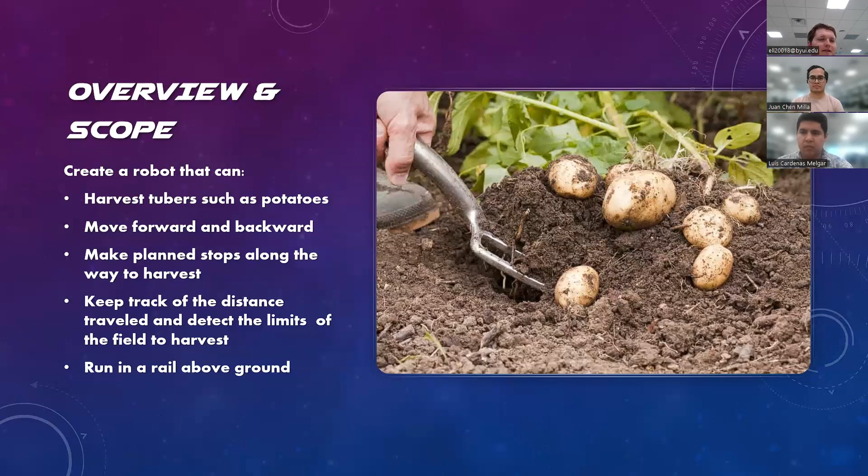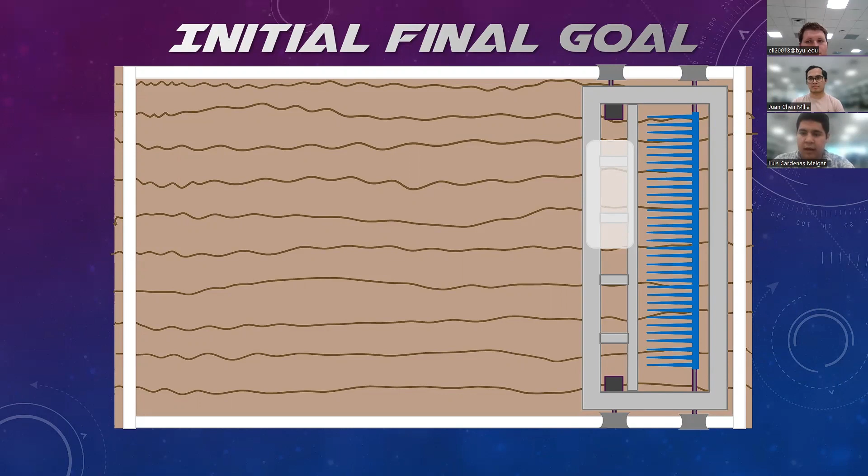Hello, my name is Luis Cardenas, and first I want to talk about what was our initial final goal. Initially, we thought about having a robot mounted on a rail, so it would be a certain amount of feet over the ground, so it could easily move and not have any problem with the dirt or anything that's on the floor. Here there is a little animation of what it's supposed to do.

It would just harvest row by row, as you can see in this animation. Once it's done doing it, it would stop at the end of the rail. In order to do this, this is more like the horizontal view instead of the view at the top.

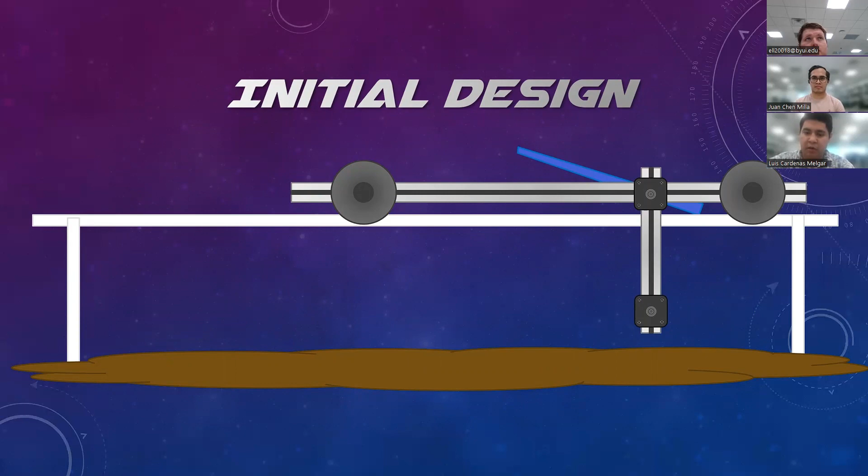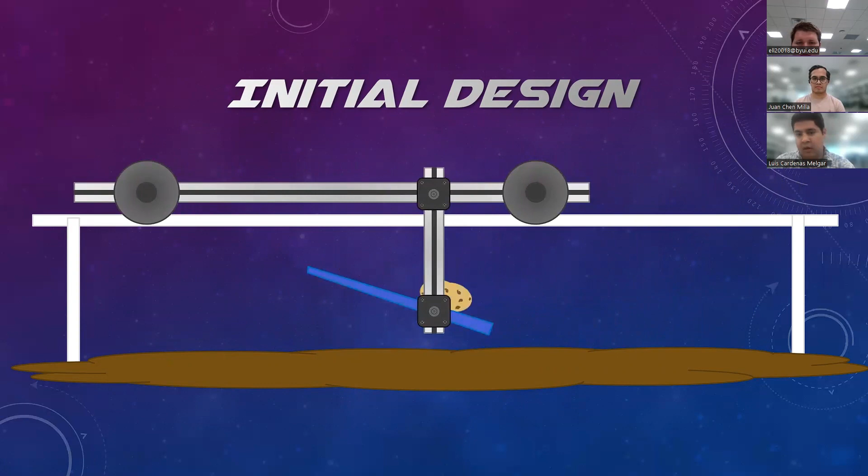We would need to have some sort of fork that could harvest the potatoes that are on the ground. This fork should be able to move down and then move forward to harvest the potato, lift it, and drop the potato behind, and then keep going to the next row.

Due to the fact that we didn't have enough budget to build the rail, and also because of time constraints, we decided to reduce the scope of our project and just make a robot to be moving on the ground. As in this animation, you can see it would just move, put the fork down, harvest the potato, and then move to the next row.

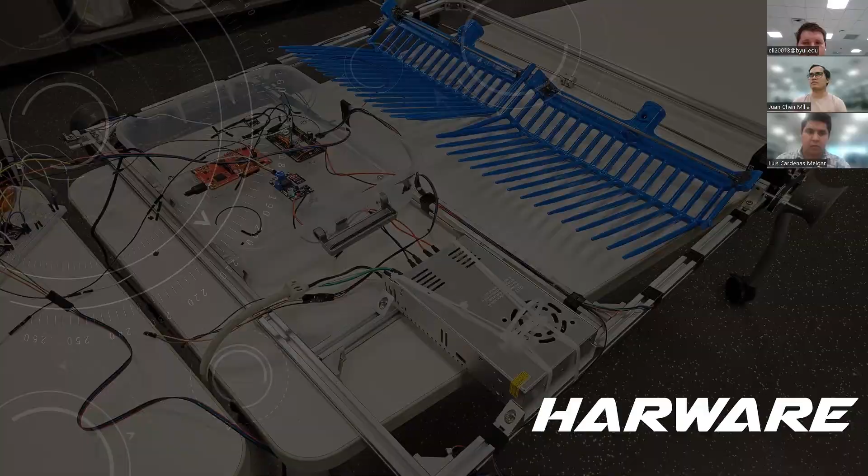My name is Juan Chen. I'm going to present about the hardware we use for this robot. We decided to use Arduino Uno since it has more libraries to operate stepper motors, and also it's fast enough for what we wanted and has enough pins. It actually has a cool feature.

It has a V-in pin, which we use to power our Arduino Uno instead of using the computer. In that case, our robot will be working by itself without depending on a computer.

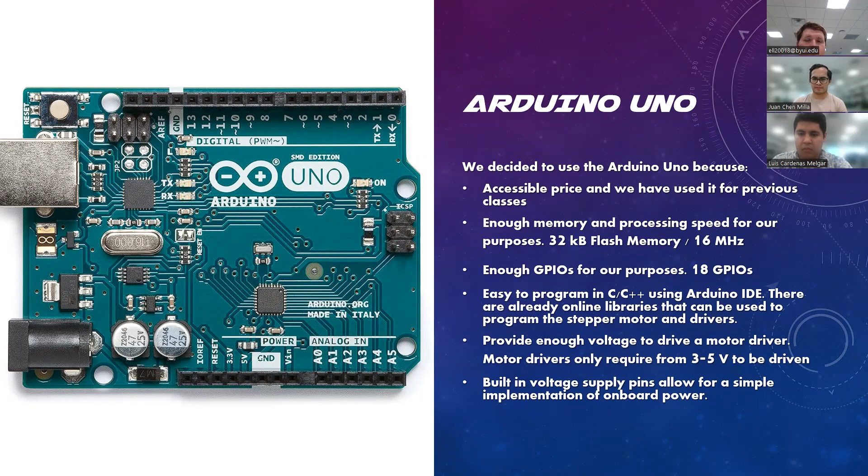To power our system, we decided to use a voltage regulator instead of using batteries. Since we didn't have enough budget, we decided to use a power supply voltage regulator. Also, since this robot is planned to be used in greenhouses, they have the infrastructure already, so there is no need to use batteries. Here are some of the details.

For example, we wanted this to step down the voltage and then convert it to DC, going from 120 volts AC to 20 to 24 volts DC. This voltage regulator has a 25 amp maximum output current and provides 600 watts of power.

We also use a DC voltage regulator since our Arduino Uno board needs a 5 volt input, and we use this to step down the voltage a little bit more to 5 volts. It's also capable of handling a maximum output current of 3 amps and a maximum output of 40 volts DC.

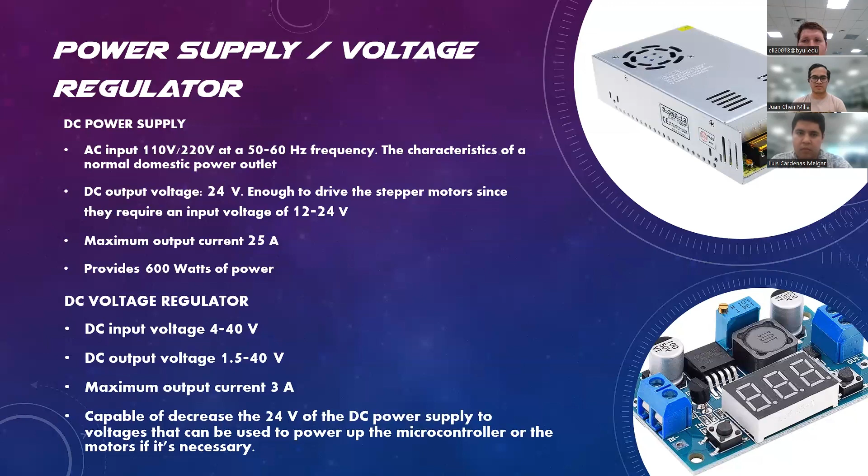And it's also able to do microstepping, which is really cool. Since if you microstep, you can slow down your motors, and also it's able to use more current. So yeah, this is what we use for motors and motor drivers.

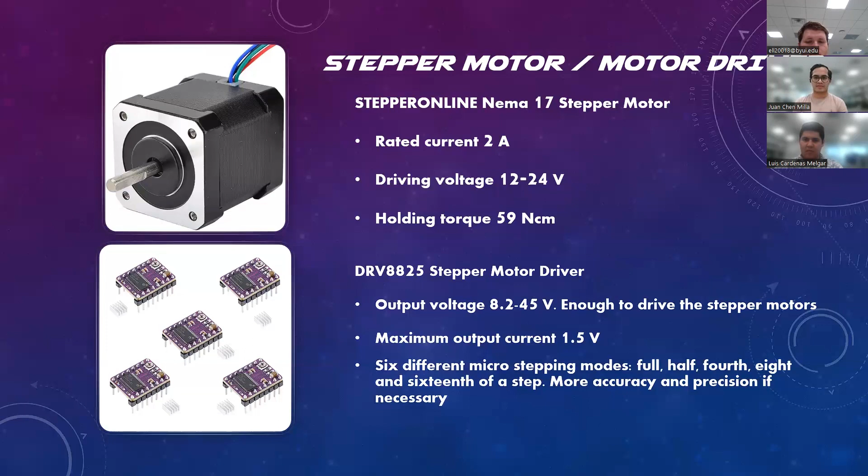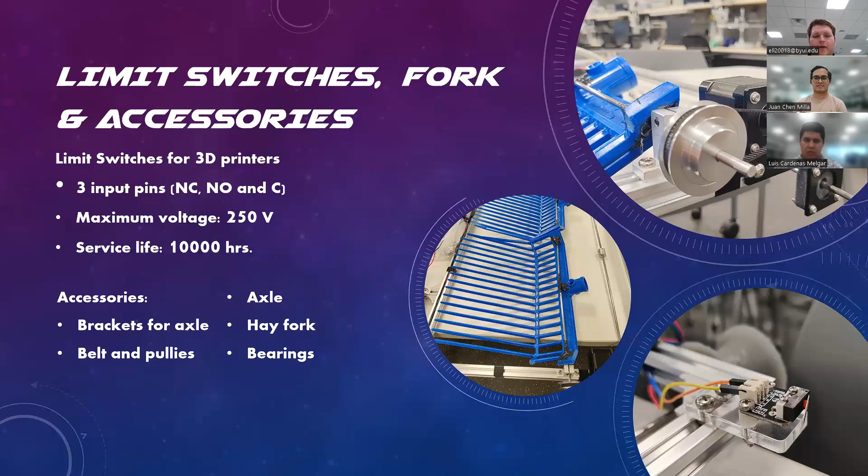We also needed some edge stop sensors so the robot could detect when it reached the end of the rails. So we used these simple limit switches, and we mounted them using custom brackets we designed. They were pretty ideal for the job since they had a lot of options for how to arrange them, and they were also decently durable.

As for the frame itself, we decided to go with some basic 2020 aluminum extrusion. These are basic T-slot aluminum beams that have 20 by 20 millimeter sides. We chose this because they're relatively inexpensive, but also very flexible. You can turn them into basically any shape you want, and they're also very strong. Using the mounting brackets, we could simply cut these beams to length and then bolt them together to create a very sturdy frame that's pretty lightweight for the strength you get out of it.

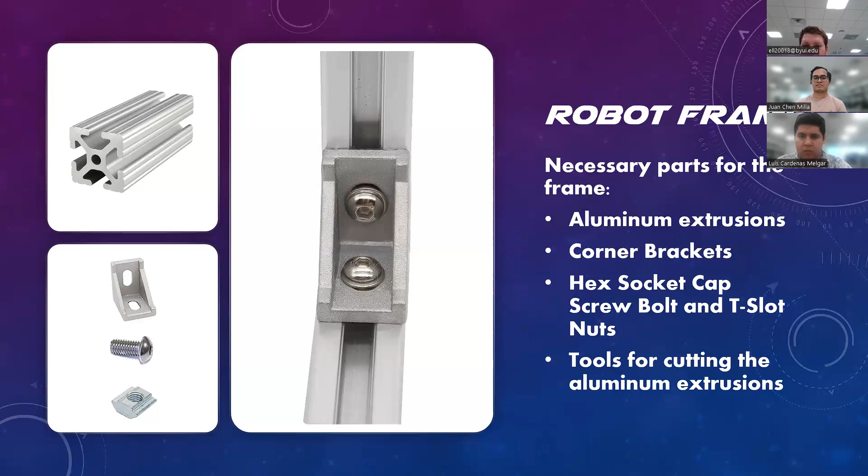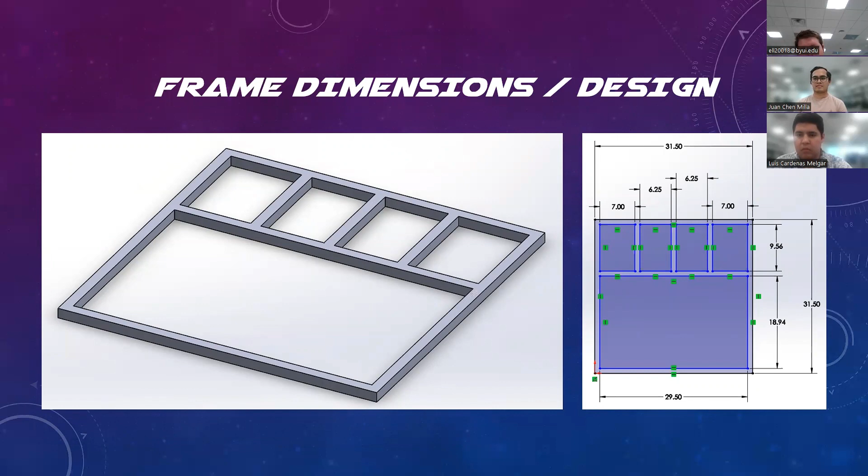So this is the design for our frame. It's a basic square. That middle section, the large middle section, is where the rakes will sit. They sit in between there, and that gives them access to the ground. The front of the robot has additional support with extra beams across it, and that is where we mount the power supply as well as the other electronics in their own little box.

As for the other components, some parts we were not able to find online at a reasonable price, so we decided to 3D print our own. We printed the wheels, and these wheels are designed with the rail system in mind. Obviously we don't have the rail system for demonstration reasons, but the robot is intended to travel on a set of rails on either side of the farm plot. These wheels facilitate that, they have an indentation, concave in the middle, which allows them to sit on a round rail.

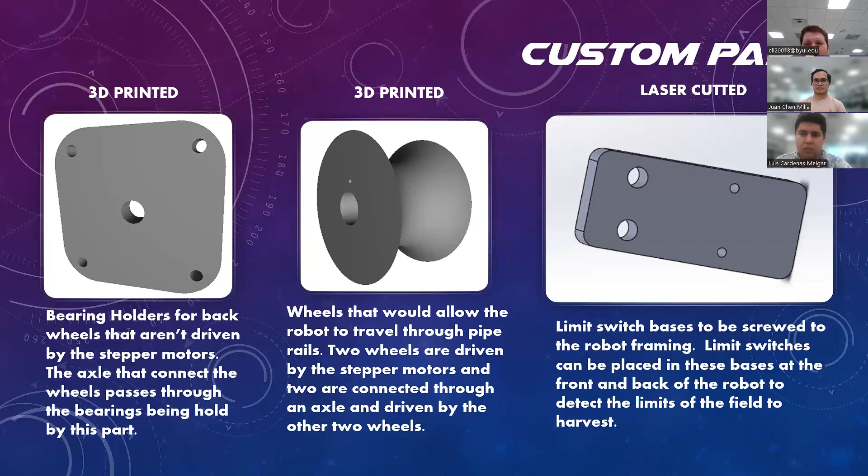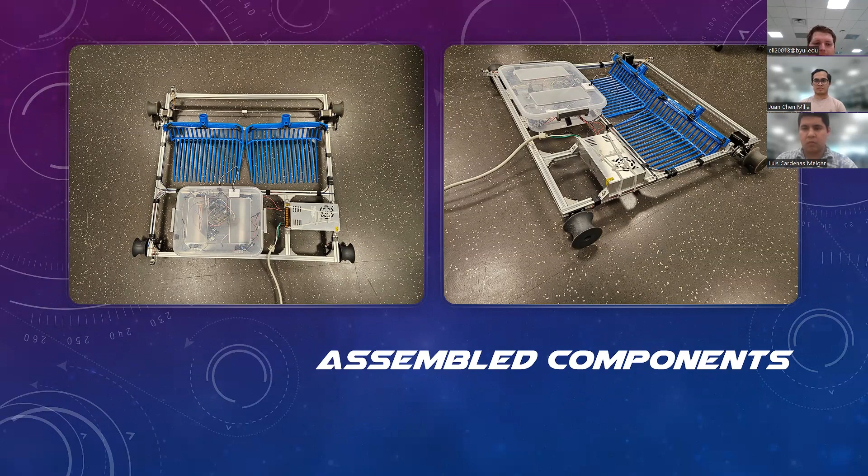And at the same time, the power supply also provides 24 volts for the stepper motors. But these 24 volts go through the motor driver first before going to the stepper motor. And also we have the signal coming from the Arduino towards the motor drivers.

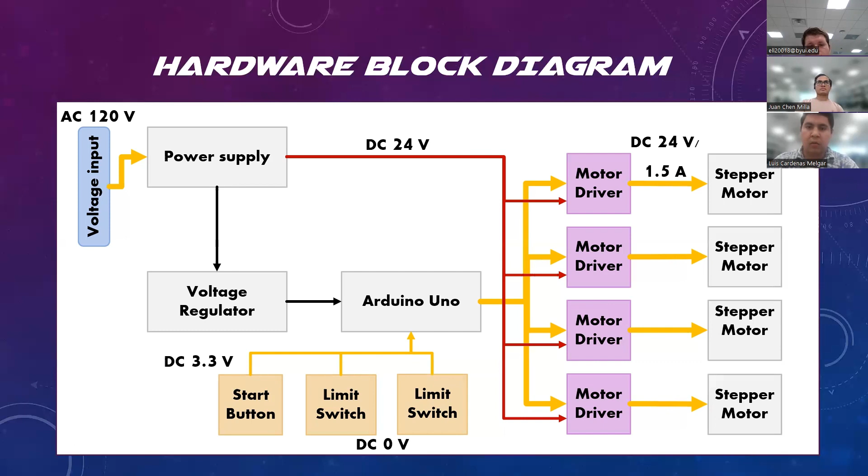And we also have the start button; we are connecting this button to 3.3 volts of the Arduino Uno. And we are using two limit switches that are receiving ground from it. And this is how we arrange our electronics also in our robot.

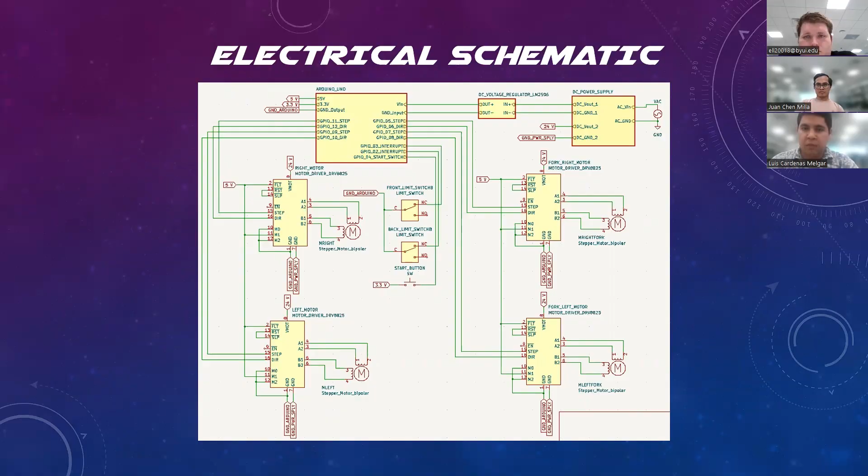All right. As for the program, the program we were running is a simple harvesting routine. The simple harvesting routine we programmed is one that didn't really have any parallel processes going on. It was all sequential. So as a result, we decided to use a basic control loop rather than an operating system. And so this control loop would go through several states, and each state would be controlled by either an interrupt or a condition based on the context of that state.

So at the start, it would initialize all its variables and create the motor objects that the motor driver library uses. And then we'd start with a basic idle state, which, once it received a signal from a push button that we have to start, would transition to its next state. And then the initial state is a calibration state where it reverses until it reaches the very back of the plot, and the back limit switch is hit.

And when that happens, the robot knows that it's at the very start of the plot, and so it resets all of its tracking variables, so its position and its cycle count. It resets all those to 0, and then it moves on to the running state, which is the start of the harvesting routine.

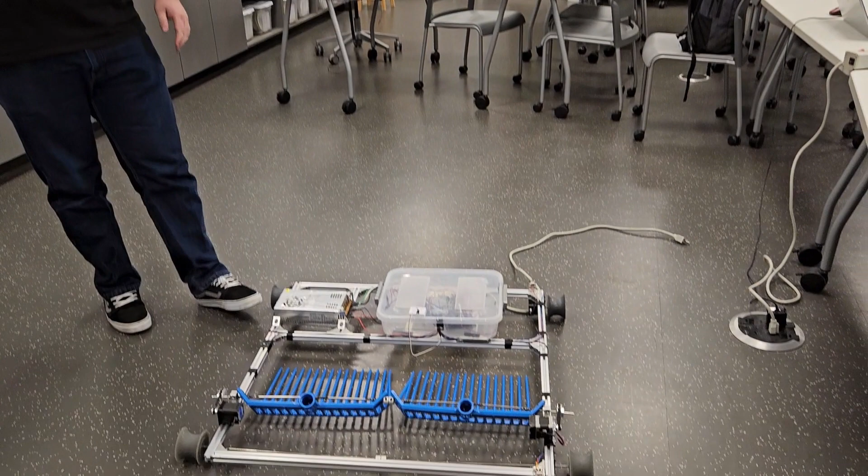All right. My name is Brandon, and I'm going to be showing you around the robot that we built for embedded systems. And here it is right here. Now this is our harvesting robot. It was designed to be used in a greenhouse, so it's a little on the smaller side. If you compare normal harvesting machines like a combine harvester, you'd expect them to be massive. This one's a little on the smaller side, also because it's kind of a proof of concept, and harvesting machines tend to be a little bit bigger than they need to be.

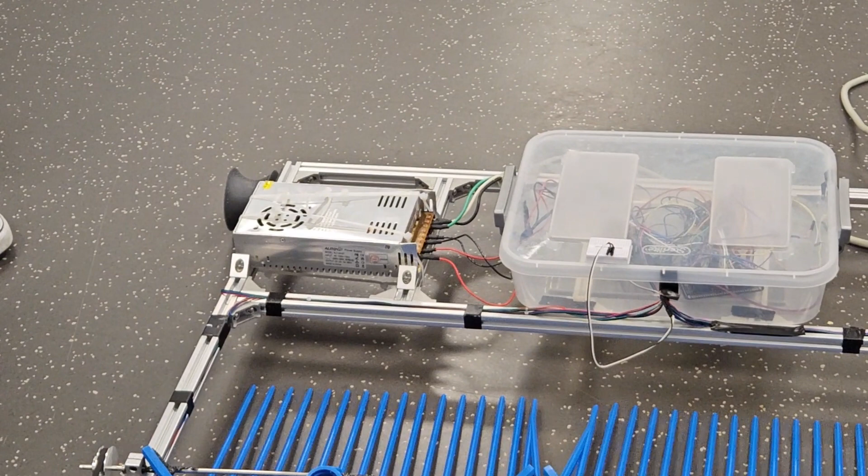So I'll walk you through some of the components. This silver box right here is our power supply. We decided to use an AC power supply to power the robot, as it was cheaper, more reliable and simpler compared to a battery system. And since we know this is going to be used in a greenhouse, it's going to have easy access to line power, so we use AC power.

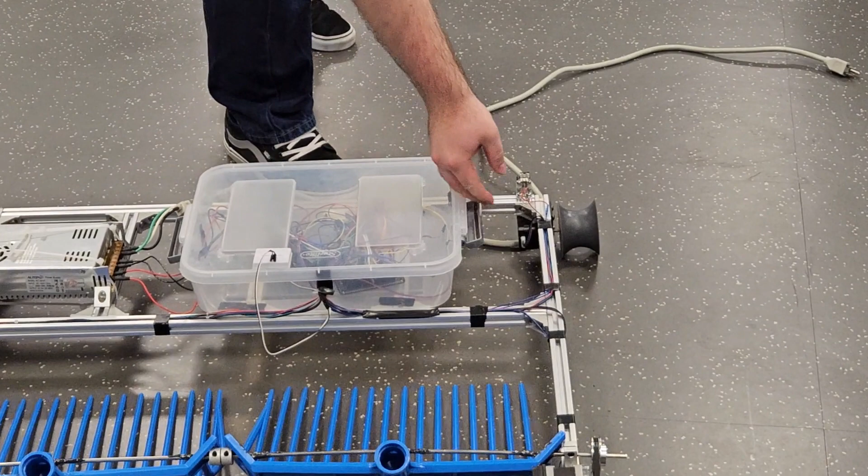Right now we just have it connected to an extension cord, but you can imagine a system where it will draw power from the rails it's riding on. So that leads into our little control box. If I pull the lid off the control box, you can see the circuitry we're using to control it.

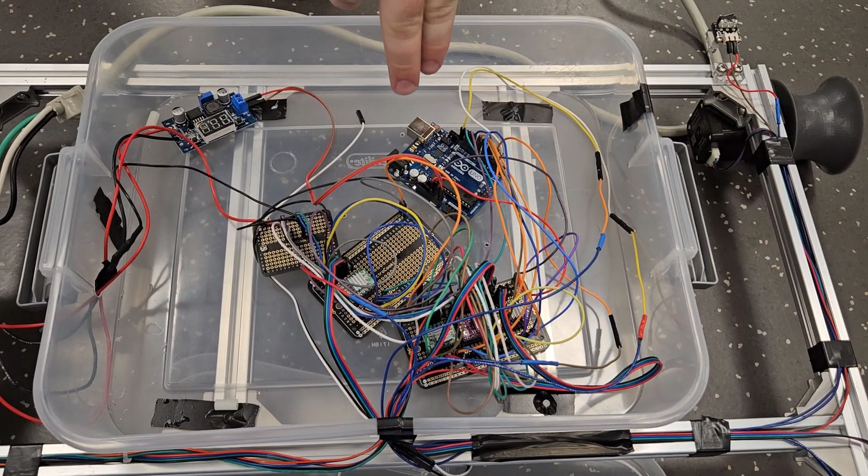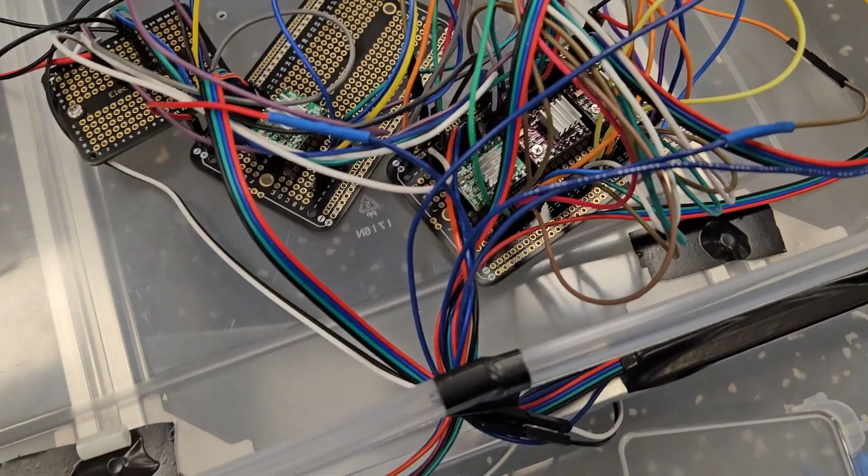So here's the Arduino. That's running the program, and it's running control signals into these 4 chips, and these are our motor drivers. They look different, but they're the same type, even though the boards are different colors. Those are in charge of taking the control signal from the Arduino and outputting the voltage to drive the motors, because the motors take a voltage that the Arduino can't handle, so the motor drivers are in charge of handling that.

They get their power from this distribution board, which splits one of the 2 incoming channels from the power supply into separate wires that go to each of the motor drivers, and then the other channel is going into this voltage regulator. This voltage regulator is set to 5 volts, and that's being pumped directly into the Arduino, which allows the Arduino to operate on its own without any external connection to a laptop or something like that.

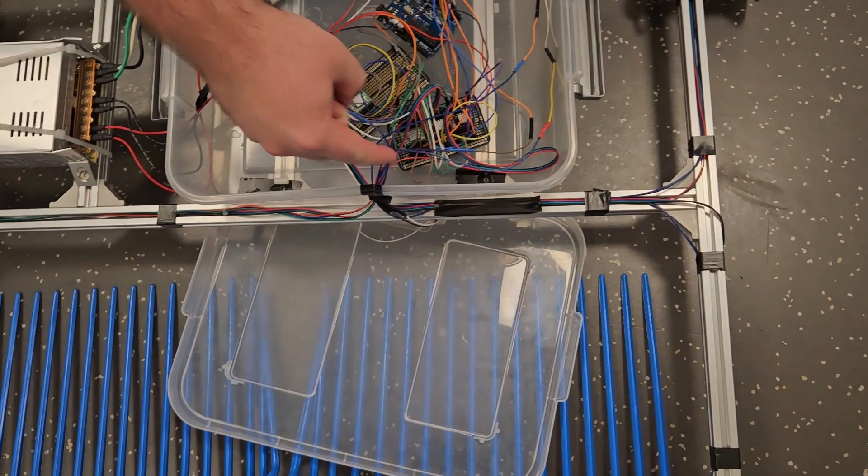And we can follow the motor cables. The motor cables come out, and they get split up to each of the 4 motors. We have 4 motors on this machine. They're all stepper motors, and we went with stepper motors because they are more precise and easy to control, and they have easier mounting options.

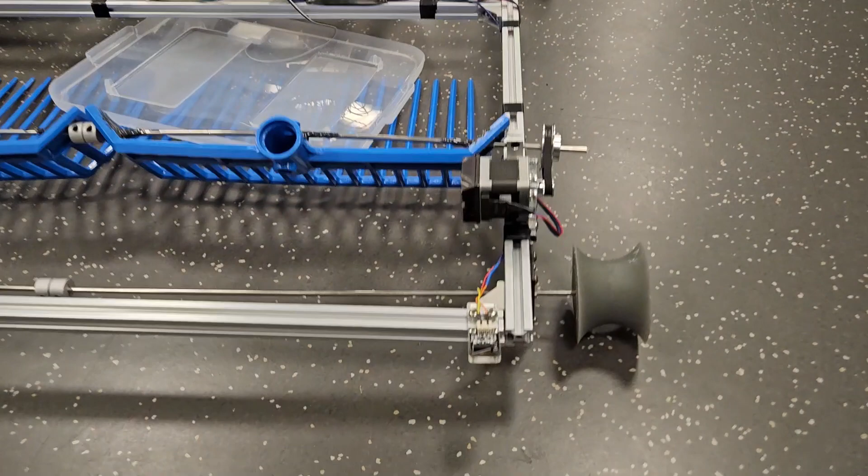And then here are our limit switches. We have one in the front and one in the back, and since the motors don't have encoders, that's how we tell the robot when it's reached the end of the rail, or when it's reached the boundaries, so it doesn't run off the course.

All right. So here's the robot as it's going through its harvesting technique. It's programmed to move forward a set distance for each row of crops, and then the rakes are supposed to flip upward, and any potatoes or beets or any underground plants would get scooped up, and by flipping it over, it would get laid out on the dirt.

Now, unfortunately, this showcases one of the main flaws with this implementation right now, which is that the motors lack a lot of power, and you can probably hear the motors as they're trying to actuate. The drive motors are moving forward, and the rake motors are trying their hardest to lift the rake up and then set it back down again. But unfortunately, the rake is a little too heavy for them, and they don't have enough torque to actually do the movement.

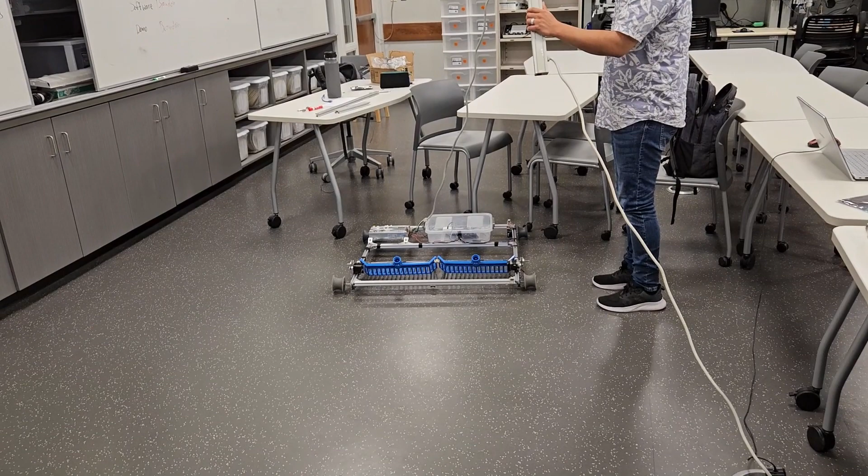And I guess that's the downside with stepper motors, is that while we gain a lot with precision, we lose a lot in terms of power for the given amount of current. Okay, now we are going to talk about a little bit of the struggles we had with our project. First, the stepper motor we decided to use didn't provide enough torque to actually move the car and lift the forks. So that was one of the initial problems.

Another struggle we had was due to the limited budget, we didn't have the chance to improve our project and upgrade the parts that we needed. We realized that we needed to change our motor driver for one that could provide more current to the stepper motor, and a stepper motor that could have more torque. But because of the budget, we weren't able to buy more to upgrade the parts. And some of the components that we had bought before were low quality components. We will talk a little bit about the improvements we suggest, and one of them is buying better quality components.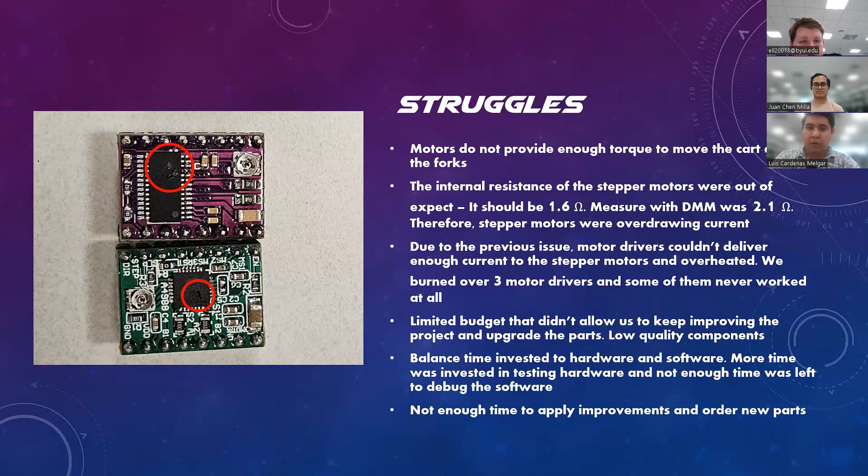Another struggle we had was to balance the time between the hardware and software. As we invested more time trying to debug things in the hardware, we didn't have enough time to actually debug the software. That was an issue of how to organize our time to work on both things at the same time. And another thing is we didn't have enough time to apply the improvements and order new parts to replace the parts that weren't working as we expected.

As part of our debugging methods, we used a logic analyzer to read the stepping signal coming out of the microcontroller, and also to check it was providing a correct square wave to the motor drivers and the microcontroller, and to check the direction signal from the microcontroller to the stepper motor.

We also used a DMM to measure the input voltage fed to the motor drivers and the microcontroller, and to measure the current the motor driver was feeding to the stepper motor to see if it was providing enough current to drive the motors. We also used it to measure the internal resistance of the motors. That's how we realized the internal resistance of the motors was out of spec.

Also, we used a function generator to create a step signal that we applied to the motor drivers, and used the oscilloscope to read the output signal coming out of the motor driver to see if it was providing the correct signal that needed to be fed to the stepper motor. We also did an integrity test of the motor drivers.

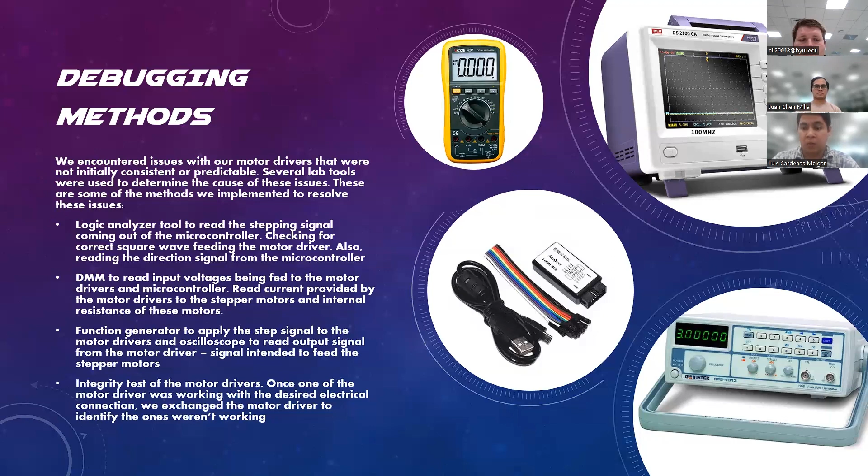Some of the outcomes from this project: first, we were able to identify the reasons why the drivers couldn't drive the motors correctly. We needed to do a lot of testing and spent many hours until we realized the problem was that some of our components were out of spec and didn't provide the torque or current that their specifications and datasheets claimed.

Also, one of the outcomes was having a harvesting robot built. We designed this harvesting robot ourselves - the idea was original. We designed the frame, custom parts, did the electronic selection, mounted the parts and the power supply, made all the electronic connections, and programmed the robot.

We were also able to have a robot that could move back and forth over the floor, and it had power autonomy since the microcontroller received power directly from the power supply and didn't need to be connected to a laptop or PC to receive power.

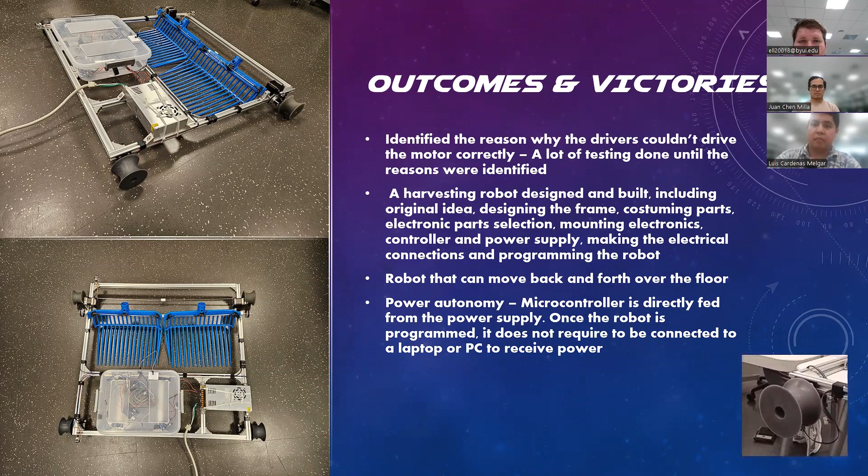As a conclusion to this point of the presentation, you have learned about the components we used for this project, and we explained the struggles we faced and the outcomes we achieved. However, there is always room for improvement. As we explained, the motor drivers we chose didn't deliver enough current to power our motors, and the motors we chose didn't have enough torque to lift our fork.

To solve this problem, we can use the DM542T motor driver, shown here in the top right of the screen. It provides more current, up to 4.2 amps per phase, compared to the one we used which only delivered 1.5 amps. Additionally, we can use the high torque NEMA 23 step motor - it's way bigger, but it holds a torque of 3.0 Newton meters, instead of the one we picked, which was only 59 Newton centimeters - a big difference.

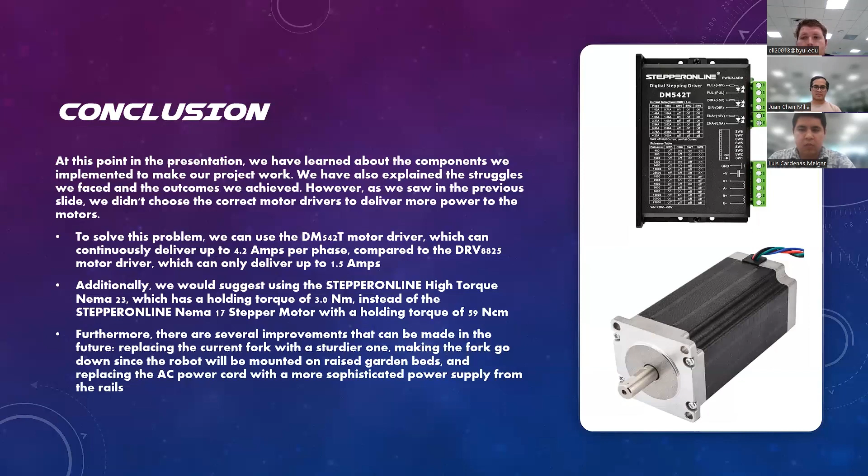As for what we learned, as mentioned before, we spent a lot of time troubleshooting hardware components, so we gained more experience using multimeters, oscilloscopes, and function generators. We also learned how motor drivers work, how step motors connect to them, and the right pin configuration. This project was time consuming, so we learned how to plan better, communicate, and delegate responsibilities. We also learned how to use power supplies and voltage regulators to power up our entire system.